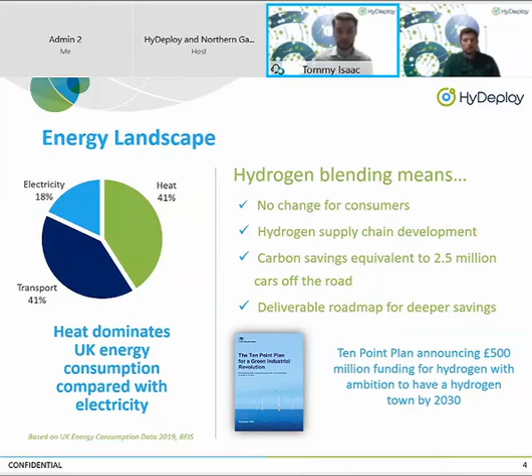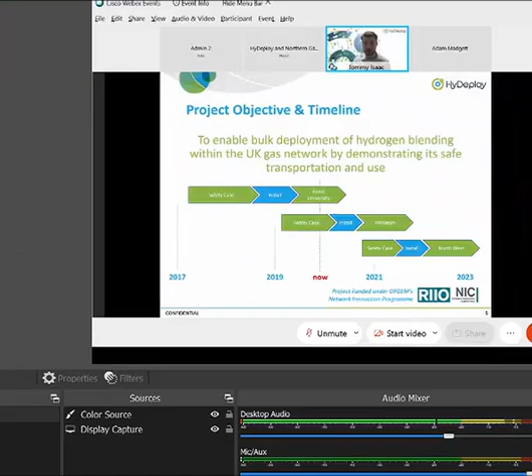The way we do that is by carrying out 3 demonstrations or trials throughout the programme, because that allows us to generate evidence that then gets reviewed by the HSE, to be used to support that demonstration under the test of as safe as the current gas.

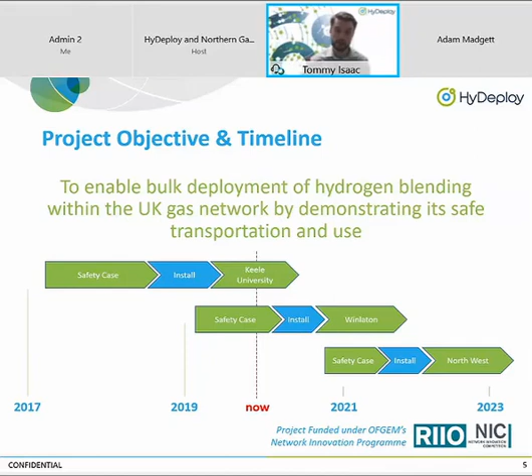So it's a 6-year programme in total. You can see from the red line where we are now. We are currently operating the first demonstration of hydrogen at Keele University, and we are at the stage of engaging with the HSE to try and agree the safety case to enable the first public trial to go ahead next year, which Adam will talk about in a few minutes' time.

So the reason why we need a new safety case, and why there's lots of research and evidence required to enable hydrogen, is because we currently have a regulatory limit that prohibits any meaningful hydrogen being blended into the system. We have the gas safety management regulations, which is the sister regulation to the installation and use, more pertinent to the gas safety community. And the gas safety management regulations limit hydrogen to 0.1%.

This is purely for regulatory expediency. This is because the regulations were aligned to the North Sea specifications when we switched over from Towns gas to North Sea gas, and because the North Sea has no hydrogen in it, they just set the limit at 0.1% because it made it easy to administer.

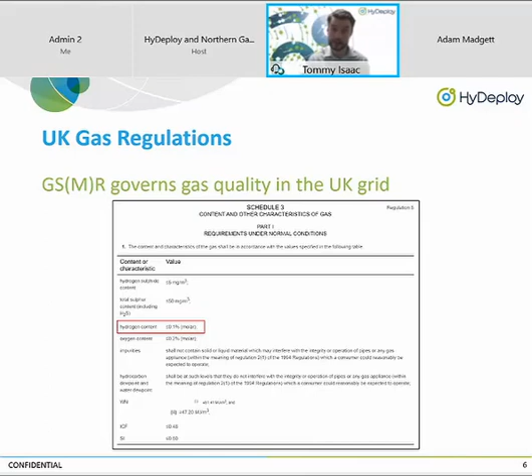Now that limit is quite rightly being challenged, because effectively what this regulation does is lock in gas towards natural gas. It means you can't really move away from methane because the law just doesn't allow you to do that. So what we are doing is trying to generate the evidence to challenge that limit, to enable hydrogen to be blended into the system.

So how do we do that, or what's the regulatory system that allows us to do that? As part of the regulations, they're governed and managed by the HSE, because they ultimately fall under the Health and Safety at Work Act of 1974. Within the regulations, the HSE is allowed to give exemptions to the regulation, only under the condition that the persons affected by the exemption aren't prejudiced as a consequence of it.

And what that means in layman's terms is that we have to demonstrate that the change we are proposing is as safe as the current gas, i.e. there's no increase in risk from anyone who's going to use that gas, either from a consumer perspective, from an engineer's perspective, and from the network's perspective. So we have to demonstrate that the blend is as safe as natural gas, and then the HSE is comfortable to grant us an exemption to the regulation to enable the demonstrations to take place.

And the idea is, if we can broaden that evidence base from small-scale trial all the way to effectively the UK network, then we can have the evidence base to challenge the regulation that says a whole system change should take place to allow 20%.

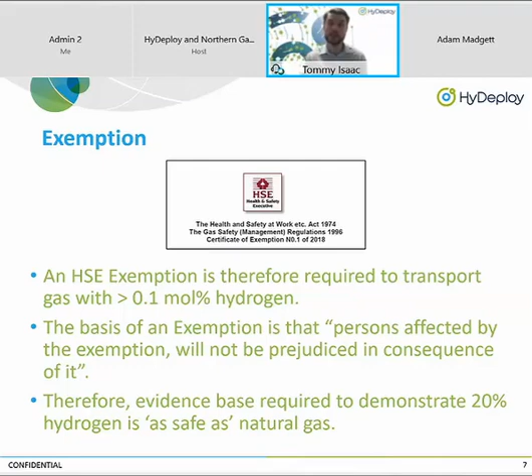So how do we do that? We build a safety case. There are effectively three main technical areas that have to be understood.

There is how the blend affects the materials of the network and the appliances, as well as the meters, basically anything that will be exposed to the blend. How does it affect the operation of the appliances? And what are the fundamental gas characteristics of the gas, both for combustion and post-combustion, that govern the system? All of the procedures that govern safe operation of both appliances, pipework and networks are fundamentally based on an understanding of the gas's characteristics.

So we have to understand what all of the relevant characteristics are to then be able to understand how procedures may be impacted by the change in gas quality.

And then all of that evidence comes together into what's called a quantitative risk assessment, which is basically a big logic tree that allows you to understand ultimately what the overall risk is to consumers based on a change of gas quality. So we can quantitatively demonstrate, prove effectively beyond doubt that there is no increase in risk.

And it's only once we've gone through that demonstration that we are able to receive the exemption from the HSE. So it is quite an arduous task.

It took us 18 months to build the evidence just for the Keele trial, and took about 3 months to engage with the HSE. It's taken another 18 months on top of that to build more evidence for the trial we're going to hear about today, and we've been engaging with them for 3 months and have probably got another couple of months left.

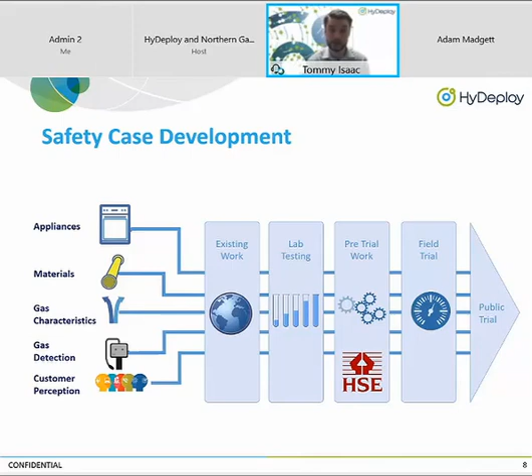So you can rest assured that it is an incredibly rigorous process that is required to allow these exemptions to be granted and allow the blending to take place.

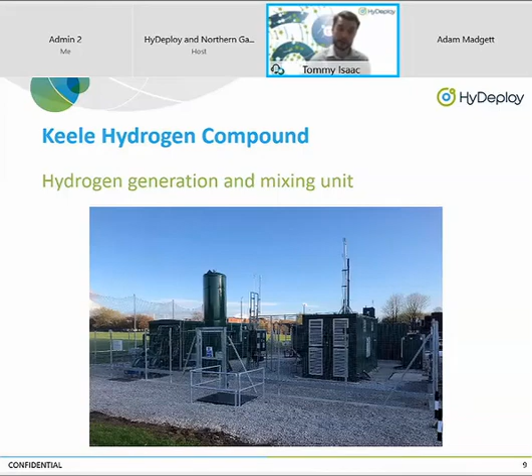So the purpose of this presentation is to go through the Winlaton trial, so I won't stay too much on the current trial at Keele, but it's just to give you a reference that we've been blending there since October of last year, supplying a blend to 100 homes as well as 30 university buildings. We've had no issues to date with downstream appliances or the network. Effectively, no one's noticed, which is the result that we were looking for.

And what that does is put on at least 15 years of life onto those boilers, between 15 and 18 years. The idea is to basically stress them over the course of a year with a blend to see if there are any long-term impacts that could be seen with the appliances.

Now, we are not expecting any impact whatsoever, and how we're trying to demonstrate this is that we have not told the manufacturers which boiler has been installed with which gas, and at the end of the trial we will then return them to the manufacturers and ask them to try and tell us which boiler was on which gas. It is our hypothesis that they will not be able to tell the difference between the two, and therefore we can demonstrate that there are no long-term effects on these appliances.

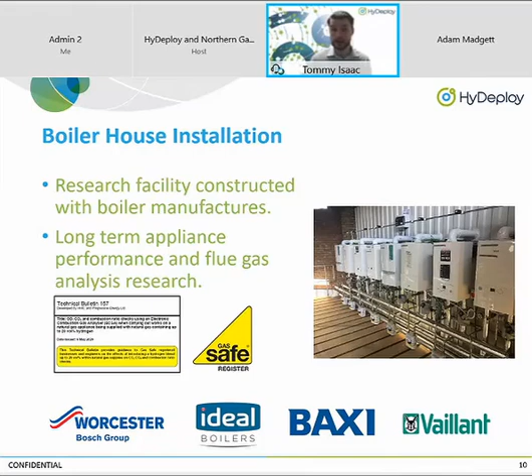That's Keele. If you've got any questions, put them in the Q&A and we'll try and pick them up. But now we're going to move on to the Winlaton demonstration.

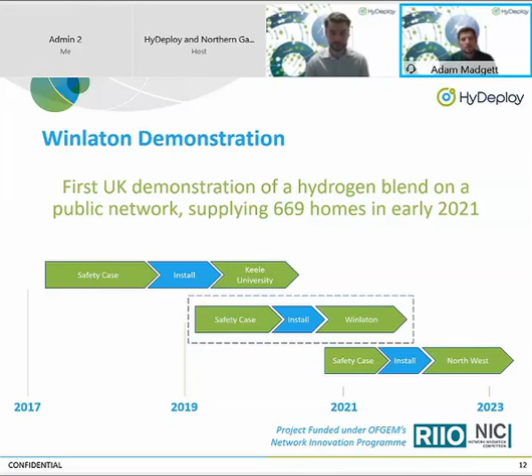Next slide, please, Tommy.

As I've mentioned in the previous slide, the location is the village of Winlaton. We've isolated the network from the other parts of the networks nearby by isolation valves, so essentially the only people that will see a blend will be the customers in that demonstration area. We will also have a hydrogen compound, located to the south of the trial area at an existing NGN site called Low Thornley.

This is where we'll have the hydrogen production equipment and also the hydrogen blending equipment. This is based on the same design as Keele, where the hydrogen will blend with natural gas and then be transported to customers. The blending unit itself is designed so that we don't go past that 20% exemption, ensuring that we stay within that limit. Next slide, please, Tommy.

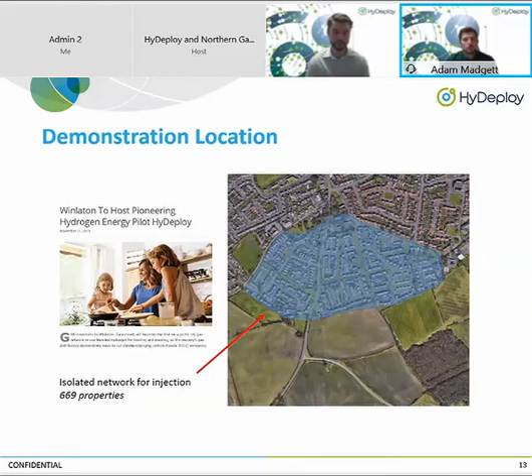One thing that's been clear from the project team from the outset is that we need successful customer engagement for us to move forward with this project, and it's critical as part of the success. We've developed a really rigorous engagement plan, built on the learnings we had from Keele, where we had dedicated customer liaisons for the trial area to feed back any questions from customers and other sources.

A key element of the program, undertaken last November, was that we needed to gain access to as many properties as we could for the trial. The reason we needed to do that was to carry out a gas safe check, so we could identify if there were any unsafe appliances, but also, more importantly, it was for us to build that evidence base of what appliances there are on the network and what these existing installations look like.

Due to the engagement plan we put together, we were able to get detailed information on 90% of the properties within the trial area. All of this was used to feed into the HSE exemption, to build that evidence and confidence that we'd gone across that breadth of appliances and understood what those installations look like.

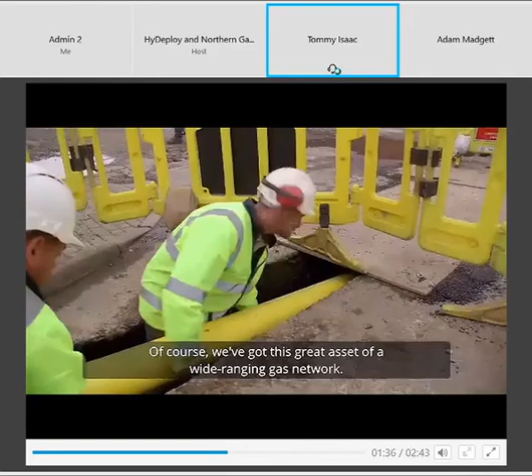The real benefit for HyDeploy is that customers don't have to make any changes to their appliances when using a blend of hydrogen and natural gas, and we as gas networks don't have to make many changes either. One of the big things reassuring for customers is that there'll be no difference at the home, no difference to how they cook, heat their home, and no impact outside. It's very clean and easy for us to turn the hydrogen on and they won't notice a difference at all. Of course, we've got this great asset of a wide-ranging gas network, and I think it seemed to many people that maybe that was going to be redundant in a green world. Well, with hydrogen, that's not going to be the case.

I've recently become a grandmother for the first time, so I'm very conscious of how my little grandson, who's not quite one yet, is going to grow up and what world he'll have. So whatever we can do to help reduce the carbon emissions and everything happening with cars and pollution, anything we can do. It has actually made me stop and think, what else could I do that may help a little bit?

I've been actually quite surprised at how open customers have been. We see it as a bit of a stepping stone to the potential for a 100% hydrogen gas network, so it allows us to build confidence with public perception, but also our own capabilities to be able to introduce a different gas mix into the networks.

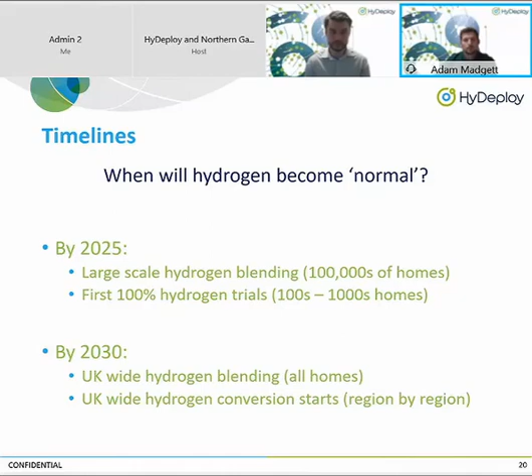Looking at 2030, there is the real possibility of blending to the whole UK, and also at that time is when we would look to start hydrogen conversion, as we did from Towns Gas to North Sea Gas, that sectorisation of the UK networks to transcend into that 100% hydrogen future. Tommy, did you have anything to add on that one? No, you covered it off.

There's a program called HyNet, which, if you're in the Northwest, is relevant to you, where there's a hydrogen program being developed to supply a blend to 500,000 homes in the next 4 to 5 years.

So these are projects, and there are multiple other projects around the UK also doing the same thing. So this isn't just a kind of academic report - these are real programs with hundreds of millions of pounds of funding to make them happen. So this is absolutely coming down the line, as soon as the projects can be developed.

Thanks, Tommy. Another relevant question that was submitted and also in the Q&A is, is there any need for retraining and new qualifications? From a blend perspective, there isn't the need to retrain - we haven't identified that to date. So the natural gas skills that everyone has now will still transfer across.

I think the key thing to get across here is that this is a presentation on downstream of the meter - so beyond the meter. So for Gas Safe registered engineers, there is currently no change identified for a 20% blend.

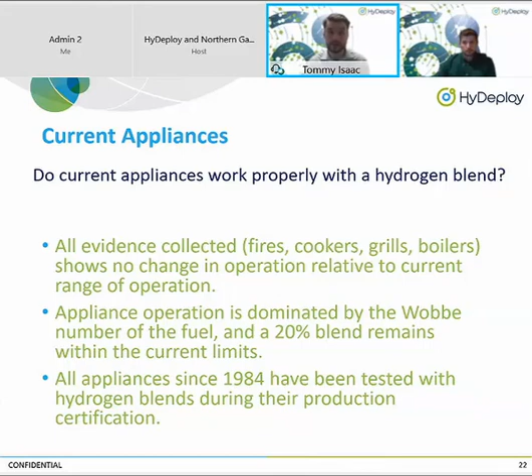Okay, thanks Tommy. So where we're now at, in terms of hydrogen appliances - there's questions of when will they be ready, and are they any different to current appliances?

There's a separate piece of work that the government, BEIS, have funded called Hy4Heat, which is focused on 100% hydrogen downstream of the meter. They've got a work package actually looking at 100% hydrogen appliances, and specifically boilers, fires, and cookers are all currently being developed and manufactured.

I think Worcester Bosch and Baxi have already got 100% hydrogen prototype boilers, and actually they are installed and being tested at a facility up in NGN's network at RAF Spadeadam, where we've got a hydrogen house. And the boiler is in there currently working and operating as mine does downstairs and yours does at home.

What we do expect is that new legislation will require all new gas appliances to be hydrogen ready by 2025, getting us ready for that 2030 vision of a 100% hydrogen network. And from what we've seen to date, all the hydrogen appliances, especially the boilers, have the same look, feel, and operate exactly as natural gas appliances. I think that's a key part of the process - to make sure that this change from natural gas doesn't change the way that we do things at home today.

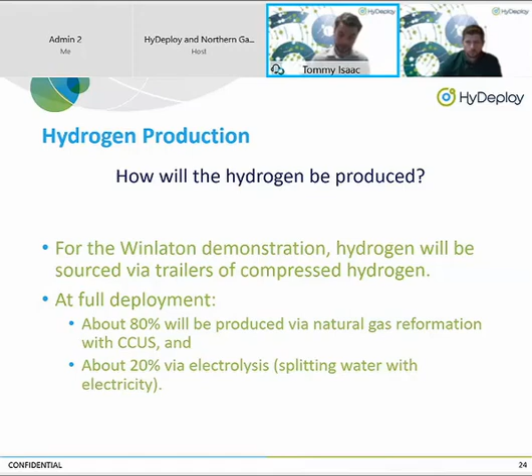So onto costs and who pays - everyone's favourite question. If we look at the two different types of production, the gas reformation, termed blue hydrogen, and the electrolysis, termed green hydrogen, they can produce hydrogen wholesale at around £40 a megawatt hour and around £160 a megawatt hour respectively.

So you can see the cost differential is what's driving that ratio of 80 to 20. If we take the majority production, the blue hydrogen, that's a carbon abatement cost of around £100 per tonne of carbon dioxide. Now that's quite an abstract way of representing these numbers.

But it's more relevant because that's really what matters. When you're comparing technologies, what matters is how much carbon do you save and how much does it cost, and one over the other tells you how effective it is as a measure. That's measured through pounds per tonne of carbon abated, and blue hydrogen operates at around £100 a tonne today.

Just for reference, that's pretty much on par with offshore wind. So you can see the amount of decarbonising you get through blue hydrogen is on par with offshore wind, which is a good sign effectively. So onto the trickier question of who pays.